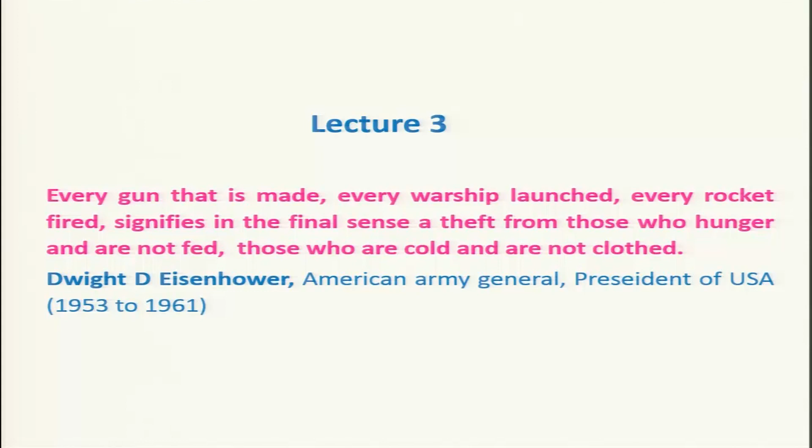Let us recall what we learned in the last lecture. We discussed various historical aspects of the rocket engine, how it evolved from the finding of gunpowder, and later how it developed into a very advanced state of technology. We will be looking at some fundamentals, and later we moved into how the space research program of India evolved, with a very ambitious program in which the rocket engine plays a very important role. Therefore it is interesting and important for us to learn the fundamentals of rocket engines.

Today we will be discussing various types of rocket engines, as we have already covered. Let us recall that rocket engines can be broadly divided into two categories: chemical rocket and non-chemical rocket. We will mostly be dealing with chemical rocket engines in this course, and toward the end we may touch upon various aspects of non-chemical rocket engines. The chemical rocket engine is further divided into three categories based on the type of propellant used: solid propellant rocket engine, liquid propellant rocket engine, and hybrid propellant rocket engine. Hybrid basically uses both solid and liquid propellants, and we will look at this in detail as we go along.

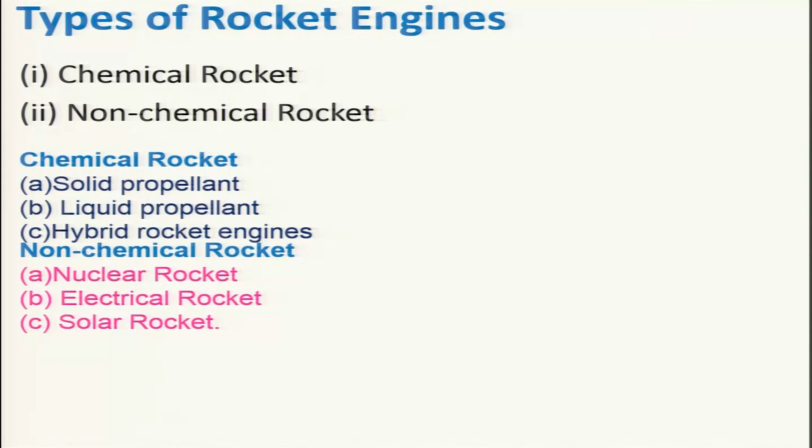So let us look at a solid propellant rocket engine, as shown here. You can see it has various components. This is the nozzle, a very important part, because the hot gas is expanded through this nozzle to produce thrust. To produce this high pressure, high temperature gas, we need to burn the propellant. This is the propellant portion, having a particular shape, which we call the grain, and it is contained in a casing with a liner that protects against heat and keeps it compact with the casing. To initiate combustion, we have igniters, which give the initial energy for starting combustion of the propellant. This high pressure and temperature gas is then expanded through the nozzle, producing thrust.

Let us look at what a liquid propellant rocket engine looks like. It is quite complex, as you can see from this diagram. It has a fuel tank, an oxidant tank, and a propellant feed system, which has a pump and a turbine, denoted T. It also has a gas generator and valves. These are basically controlling valves, and they are there for the fuel tank as well.

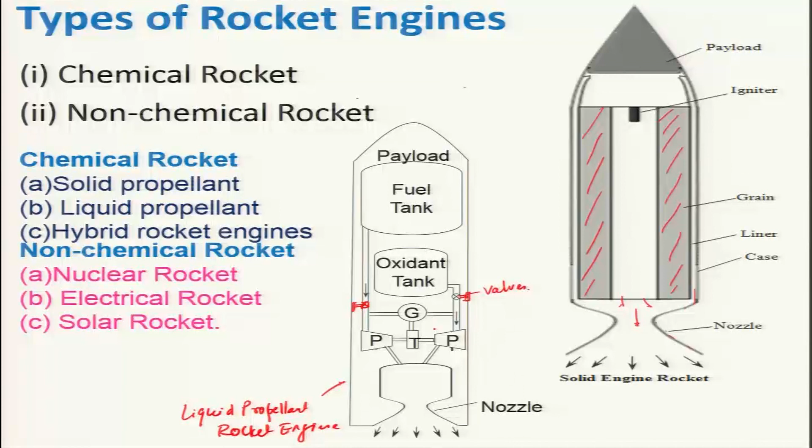And if you look at it, it is quite complex in nature as compared to the solid propellant rocket engine. So, therefore, it is being used routinely for particularly higher stage operations, and as you go along we will see in detail. Let us now look at basically solid propellant rocket engines, as I discussed earlier.

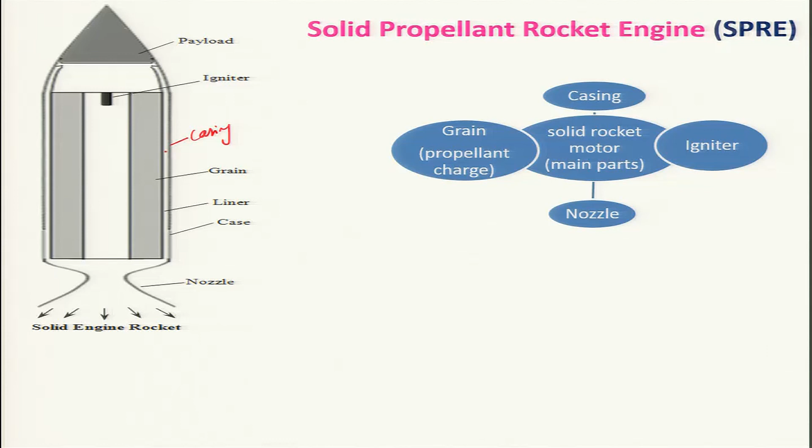It will be having basically 4 components. One is the casing, in which the propellant of proper shape and size is fitted into with the help of the liner. This portion is your liner, and this is your propellant. This portion is your propellant grain, and we also call it a propellant charge, because it contains both the fuel and oxidizer content.

And this is your igniter, which will help in initiating the combustion process by providing initial ignition energy. The nozzle plays a very important role for expanding the high temperature gas. This high temperature and pressure gas will be produced here, and it will pass through this and be expanded in the nozzle for producing thrust.

So, as I told, the grain plays a very important role due to the fact that the propellant grain burns in a predictable manner and produces the high temperature and pressure exhaust gas that is expanded in the nozzle.

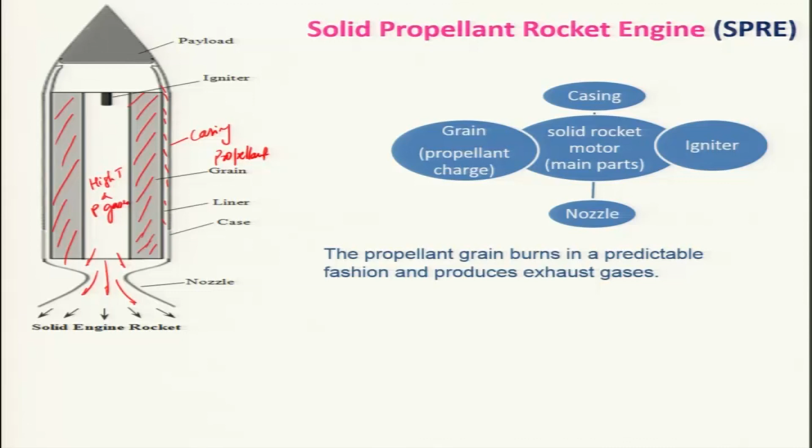So, sometimes we call the solid rocket engine a rocket or a motor, because it contains the propellant charge necessary for combustion within the combustion chamber that cannot be shut off once ignited. That is the limitation of the solid propellant rocket engine.

However, of late there is a provision for shutting down the solid propellant rocket engine, which can be throttled and extinguished, and also reignited if necessary. Modern designs include steerable nozzles for guidance and control, and one can also recover the hardware through parachutes, and have provision for attitude control with small motors, along with thermal management of materials and other things. These are all part of advanced rocket engines.

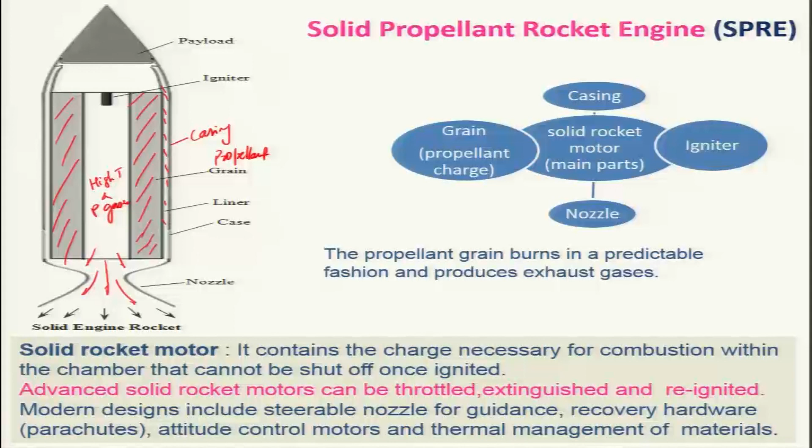Generally, it is not really possible to control or shut off the rocket engine once it is ignited. So, what we will be looking at next is the advantages and disadvantages of the solid propellant rocket engine over the liquid propellant rocket engine. We call solid propellant rocket engine SPRE, and similarly liquid propellant rocket engine LPRE, in short form.

So, it is simple to design and develop, as we have seen. It has a very small number of components as compared to the liquid propellant engine, which is quite complex in nature, as we discussed earlier with its schematic diagrams. It has a feed system, a pressurizing system, an ignition system, which I didn't discuss, besides the injection system, and there are several complexities involved in that.

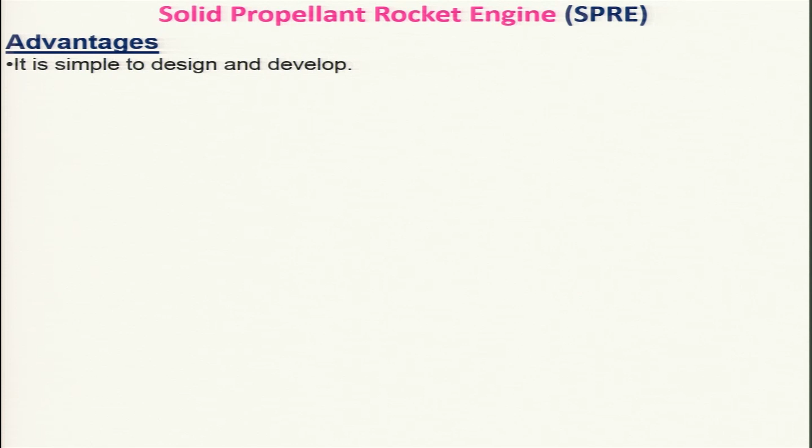The solid propellant rocket engine is easier to handle and store the solid propellant, unlike the liquid propellant, and it is easier to fire. For firing or igniting the liquid propellant rocket engine, you need a lot of preparation, which is not the case for the solid propellant rocket engine.

And detonation hazards of many modern solid propellant rocket engines are quite negligible. One cannot rule it out, but it is quite negligible because of certain safety provisions incorporated in the modern solid propellant rocket engine.

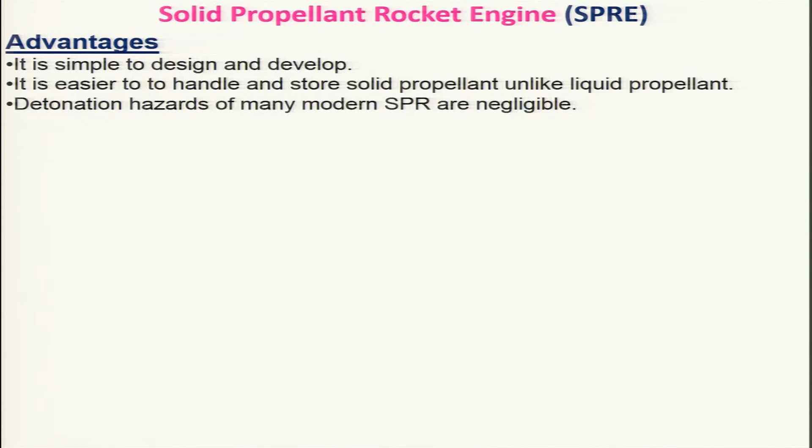And it has better reliability than the liquid propellant engine, with some claiming reliability on the order of 99%, which is quite high. It is much easier to achieve multi-staging of several solid propellant rocket engines, or motors as we call them. Engine and motor will be used interchangeably, although there is a small difference between them. Nowadays people are using the term rocket engine more than rocket motor.

So the combustion pressure in the solid propellant rocket engine is generally much higher than in the liquid rocket engine, due to the fact that it does not have the limitation of a feed system. As we go along, we will learn more about it. Because of the feed system in the liquid propellant rocket engine, we cannot go for high pressure operation.

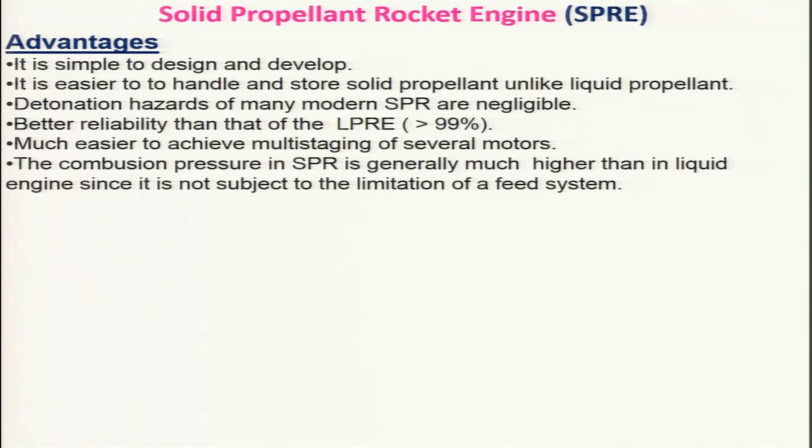Another problem with not going for high pressure in liquid propellant rocket engines is that the thickness of the combustion chamber will be higher, as the flame will be in contact with the wall of the combustion chamber. In case of solid propellant rocket engines, the flame is contained inside the grain, which is quite thick to start with. The developmental and production cost of solid propellant rocket engines is much smaller compared to liquid propellant rocket engines, especially at higher thrust levels.

Let us look at the disadvantages of solid propellant rocket engines. It has a lower specific impulse compared to liquid or hybrid propellant rocket engines. In spite of this low specific impulse, it is used in the booster stage, keep that in mind. It is also difficult to turn off its operation, unlike liquid propellant rocket engines. However, in modern times, people have devised ways to shut it off even during operation.

Transport and handling of solid propellant are quite cumbersome due to various safety reasons, and in modern days, with people involved in terrorist and other activities, theft of the propellant is one big problem.

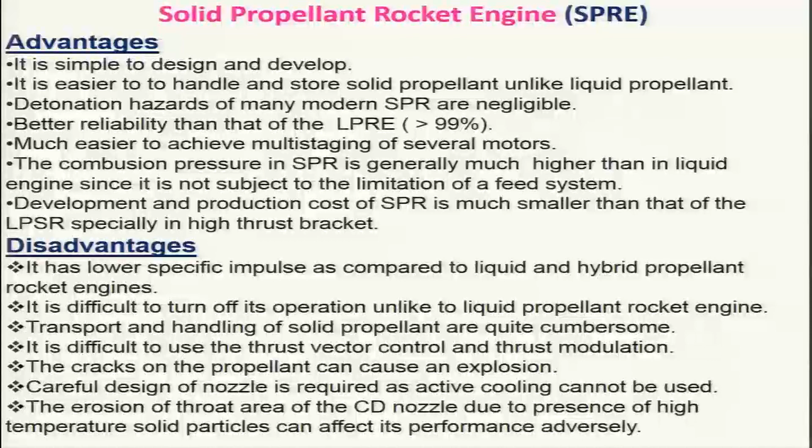The erosion of the throat area of the convergent-divergent nozzle due to the presence of high temperature solid particles can affect performance adversely, because solid propellants burn in the combustion chamber. There is a likelihood of some particulates being present at very high temperature. Besides this, metal loading is used to enhance the specific impulse of the solid propellant rocket engine. This hot, high velocity metal may impinge on the surface of the high temperature nozzle, eroding it and affecting the performance of the rocket engine.

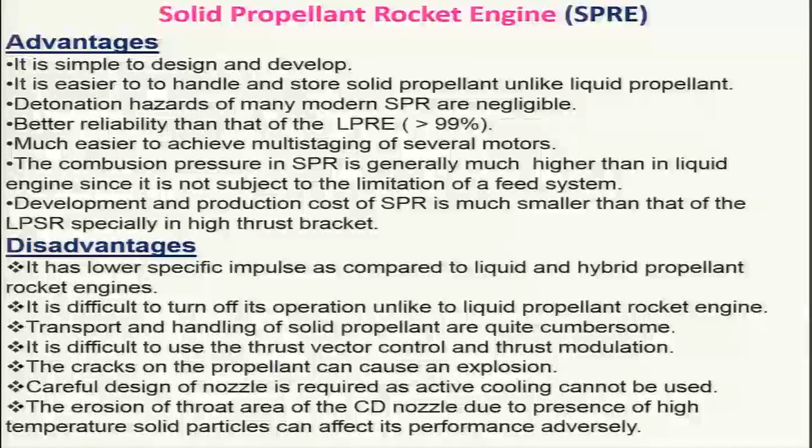So let us look at liquid propellant rocket engines. You can see that it uses various kinds of propellant, which we will discuss a little later, but just to give an idea, we have monopropellant rocket engines, bipropellants, and tripropellant rocket engines. Liquid propellant engines can be divided into basically three categories based on the kind of propellant being used.

Bipropellant rocket engines are ones in which liquid fuel and liquid oxidizer are used, whereas monopropellant is a single propellant that acts as both fuel and oxidizer. An example of bipropellant rocket engines being used nowadays, due to its high impulse, is liquid hydrogen and liquid oxygen, also known as the cryogenic engine.

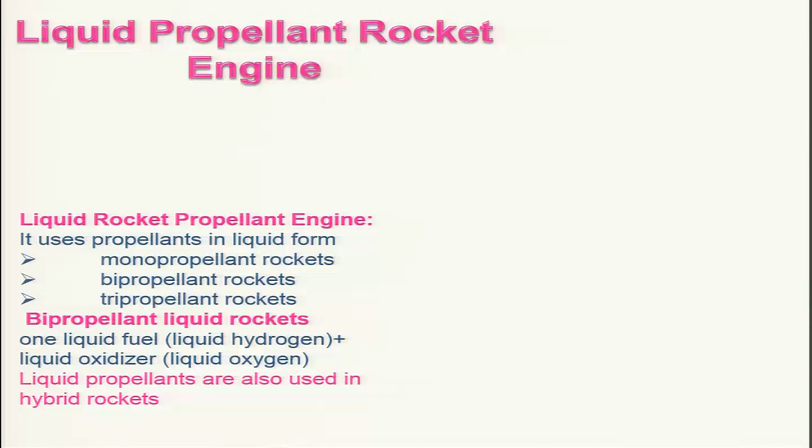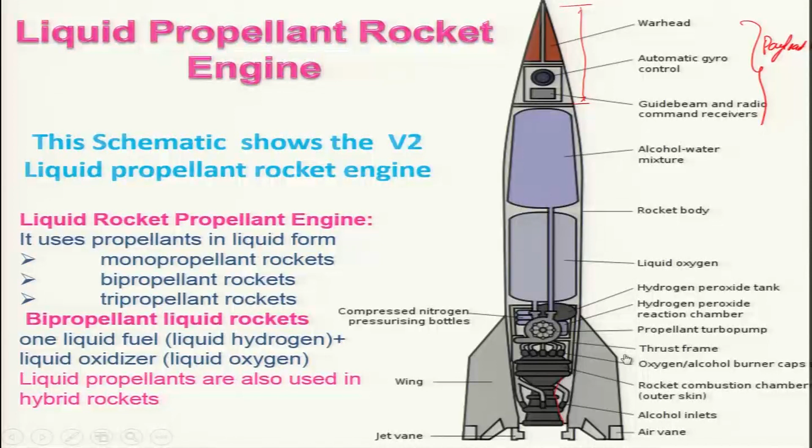So, let us now look at the advantages and disadvantages of the liquid propellant rocket engine over the solid propellant rocket engine.

Liquid propellant rocket engines can be used and reused very easily, and it provides greater control over the magnitude and direction of thrust, unlike the solid propellant rocket engine, because thrust vector control cannot be adopted there very easily, whereas here it can be used very easily. It can also have higher values of specific impulse. As we go along, we will see it is much higher compared to solid propellant rocket engines.

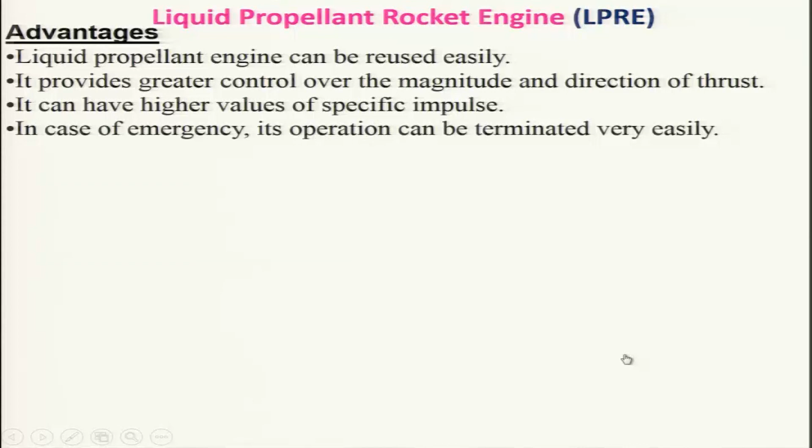In case of emergency, its operation can be terminated very easily, unlike the solid propellant rocket engine. It can be used in pulse mode, unlike the solid propellant rocket engine. However, in the present day, solid propellant rocket engines have been designed using different kinds of propellant grains, such that they can also be operated in pulse mode.

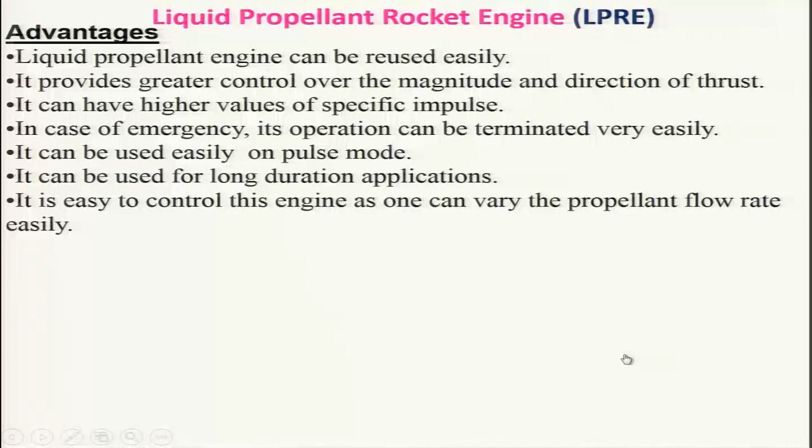It can be used for long duration applications, depending on how much propellant you can carry, and besides this, provision can be made to refill it if required. It is easy to control this engine, as one can vary the propellant flow rate easily, unlike the solid propellant rocket engine, where the burning rate is not that easy to control unless it is designed a priori.

The heat loss from the combustion gas can be utilized for heating incoming propellants, which will be used particularly for cooling the nozzles, which we will discuss later on. As a result, it will be more efficient with the energy being utilized properly.

So, for disadvantages, this engine is quite complex compared to the solid propellant rocket engine. The space requirement for storing the propellant is quite high, as is that for the feed system and pressurizing system. It is less reliable, as there is a possibility of malfunctioning of the turbo pump, turbine, injectors and valves, because there are several components being used, as we had seen earlier.

Certain liquid propellants require additional safety precautions which must be taken care of, otherwise it will lead to hazardous situations. It takes much longer time to design and develop these engines because their components are quite complex to design and manufacture. So it becomes very heavy, particularly for short range applications, and it has several components.

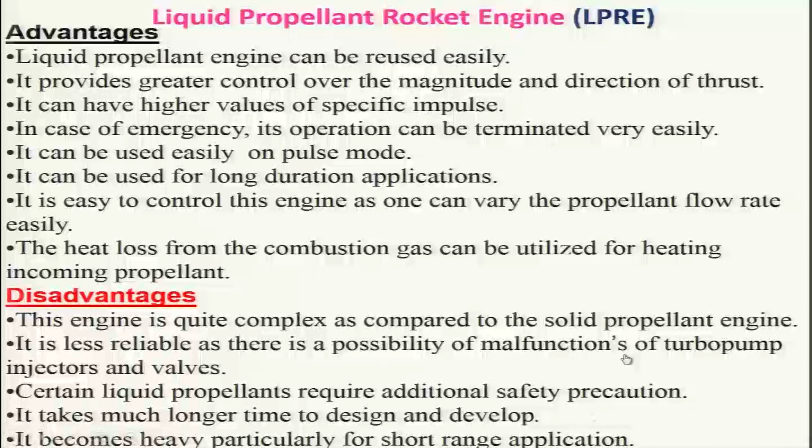So, let us look at hybrid rocket engines. In case of hybrid rocket engines, generally the liquid oxidizer is used, and it is a combination of both solid propellant and liquid propellant. In this case, there will be igniters, there will be injectors like in liquid propellant rocket engines, that system will be there, and besides this there will be solid propellant.

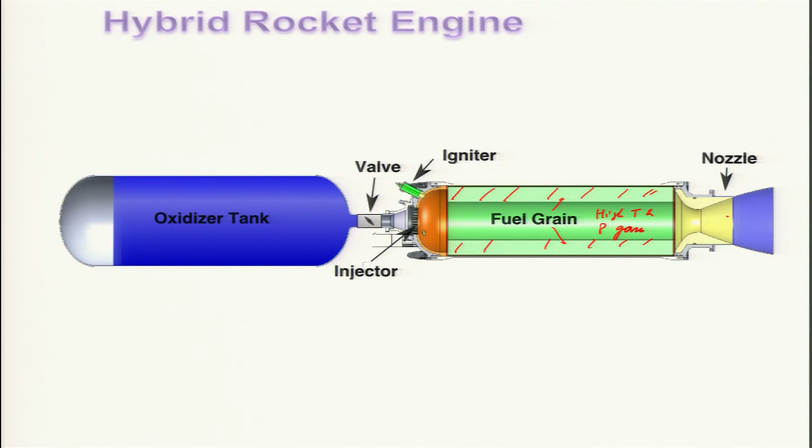These are basically solid propellant grains which will be burning, and the high temperature and pressure gases will be produced in this combustion zone or combustor, which will be expanded in the nozzle such that we can produce the thrust. It has certain advantages over both the solid and liquid propellant engine.

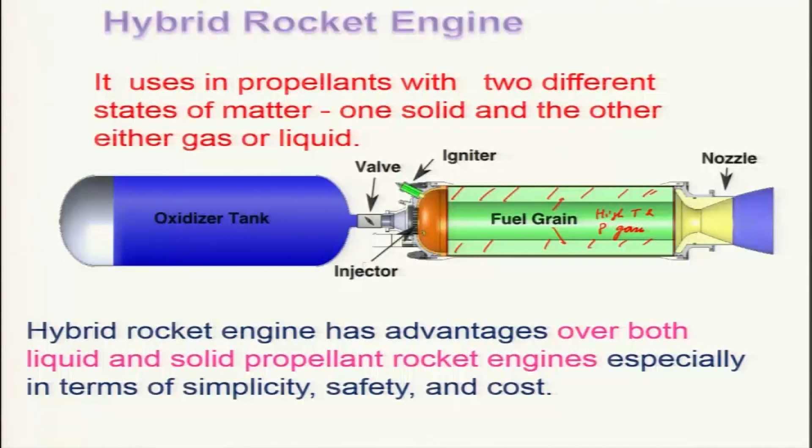As I told earlier, it uses propellant with two different states of matter, one is solid and other is liquid, or gas can also be used. The hybrid rocket engine has advantages over both liquid and solid propellant rocket engines, especially in terms of simplicity, safety and cost. It is much simpler compared to the liquid propellant engine, but it is complex compared to the solid propellant engine. It is in between both.

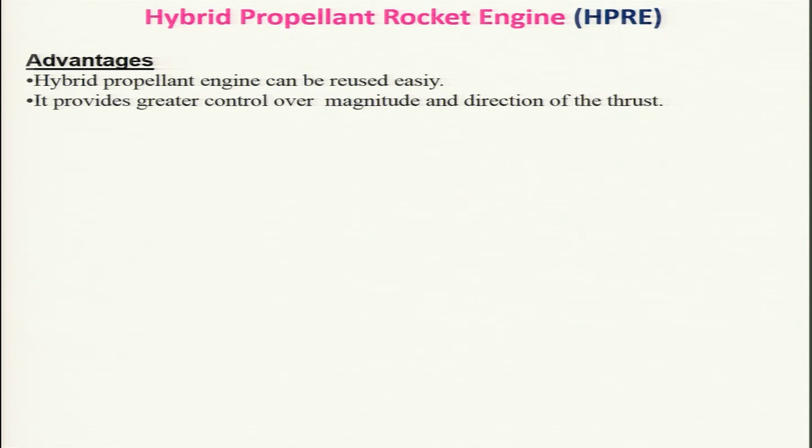Let us look at the advantages. Hybrid propellant engines can be reused easily, and provide greater control over the magnitude and direction of thrust. It has a relatively lower system cost compared to the liquid propellant rocket engine, owing to the fact that the fuel feed system and pressurizing system won't be there. It can have higher values of average specific impulse compared to solid propellant rocket engines, and higher density specific impulse than liquid propellant rocket engines. It has higher volume utilization compared to liquid propellant rocket engines, and has start, stop and restart capability, unlike solid propellant rocket engines.

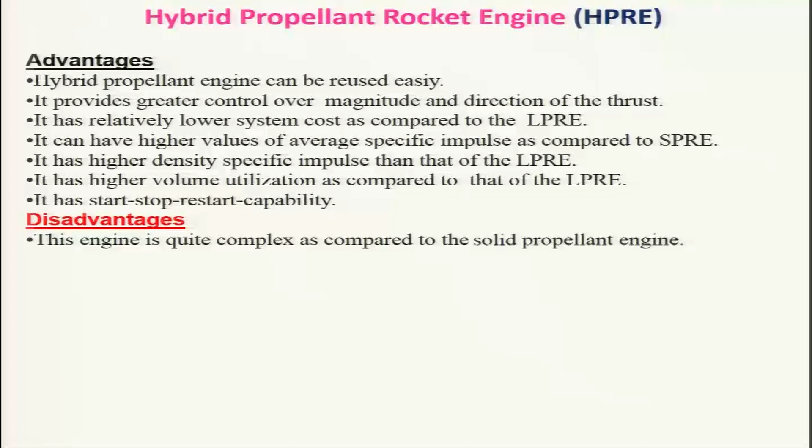Disadvantages: this engine is quite complex compared to the solid propellant rocket engine, and its mixture ratio varies to some extent, making it difficult to achieve steady state operation. It has lower density specific impulse compared to the solid propellant rocket engine, and often the solid propellant is not utilized properly due to remaining larger slivers of grain at the end of operation.

Therefore, it is not really very cheap or efficient, and certain liquid propellants require additional safety precautions. It takes much longer time to design and develop, like the liquid propellant rocket engine, and becomes heavier, particularly for short range applications. It is not being used very much in practical applications, and is therefore considered an unproven propulsion system for large scale applications. However, people are working on it, and in future it will be used profusely, as I could see.

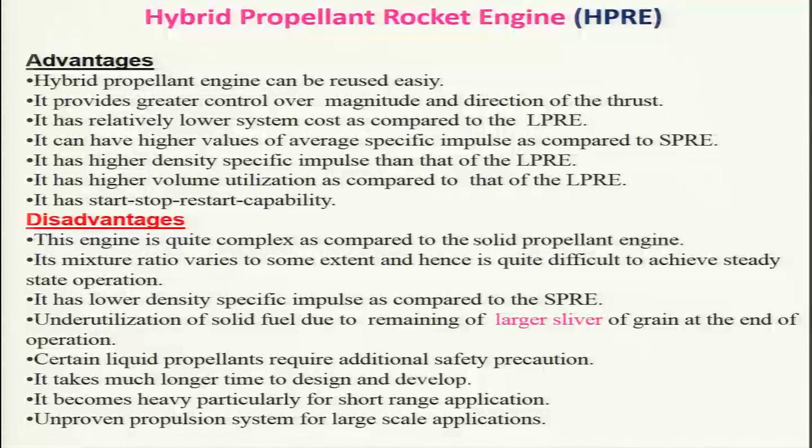Let us discuss the applications of rocket engines. A question might arise: what are the applications of rocket engines that you can think of? Generally, the basic space applications are space launch vehicles. Other applications are deep space missions, such that we can use our spacecraft, and particularly for missiles.

These are the three common applications one can think of, but besides this it can be used for several other applications depending on the imagination and innovativeness of people's minds and their necessity. Research airplanes use it routinely, and even for testing of scramjet engines, the rocket engine is being used. It is used for ejection of crew escape capsules from the spacecraft.

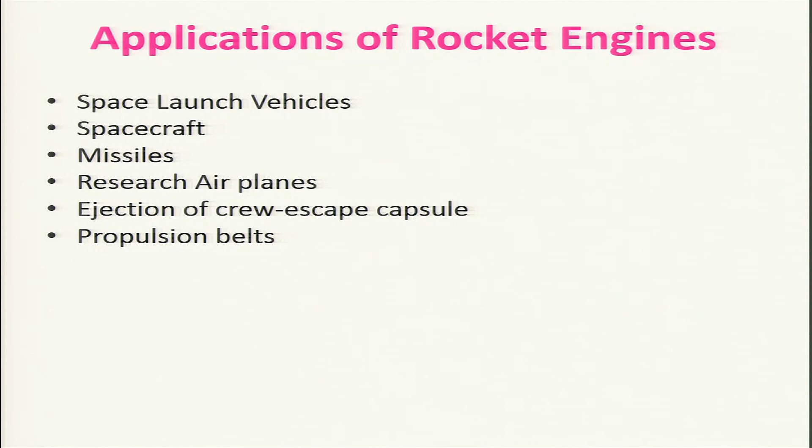And propulsion belts, which had a commercial application - some people in USA were developing it as a commercial venture to experience the elation of floating. Propulsion for target drones is used routinely, signal rockets for sending signals to other places, sounding rockets for studying the atmosphere used routinely, vernier rockets used for thrust vector control, spin rocket engines, and throwing lifelines to ships in turmoil, particularly in tornadoes and other situations where you cannot really move, but can send lifelines to ships.

Even in India, we can use rockets particularly during floods or other mishaps where you cannot access the people - you can send food and other materials to save the lives of people marooned in floods or other situations.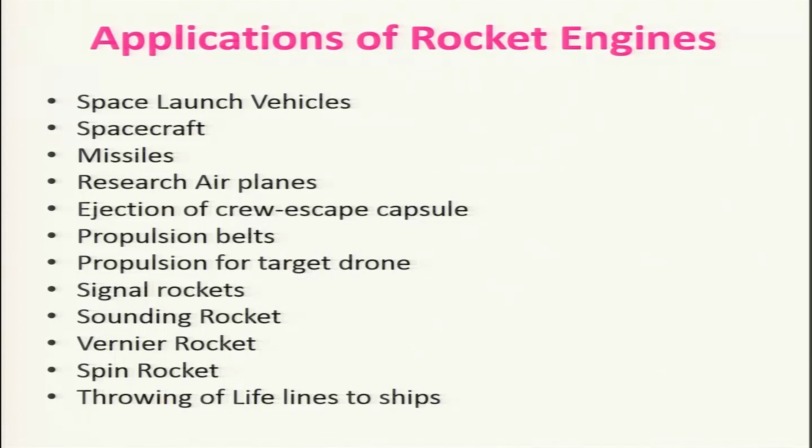So we will stop here, and the next lecture will discuss aerothermodynamics related to rocket engines, which will be useful for rocket engines. We will discuss fundamentals of aerothermodynamics that can be utilized for the rocket engine. Thank you very much.